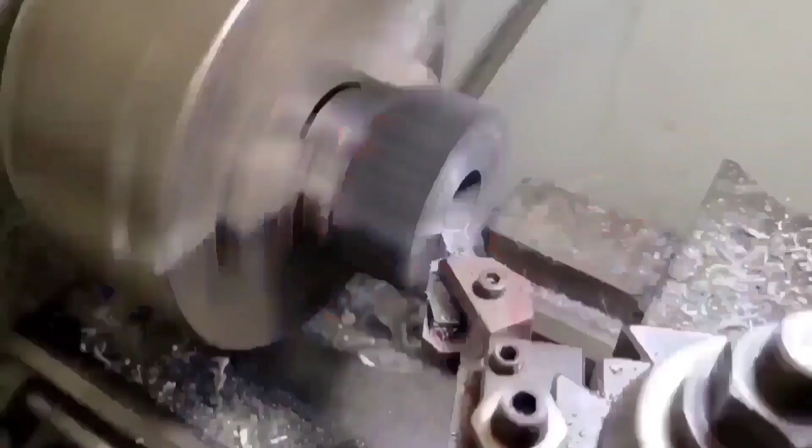How you doing, guys? Today we are starting the reassembly of the Briggs & Stratton engine.

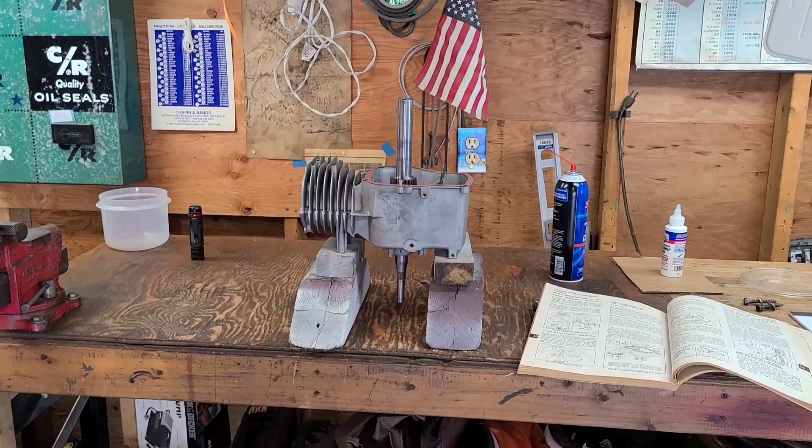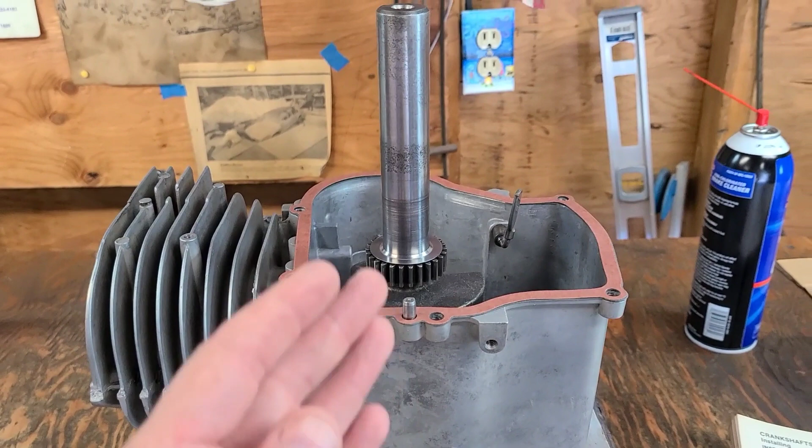One of the last things I had to do or measure was the crankshaft end play. There was a ton of play in the crankshaft, almost 20 thousandths. So this thing with a 15 thousandths gasket, which is the minimum, and the cover had four of the bolts in and snugged down, it still had, with the dial indicator, 21 thousandths of end play. So the crankshaft knocked around quite a bit.

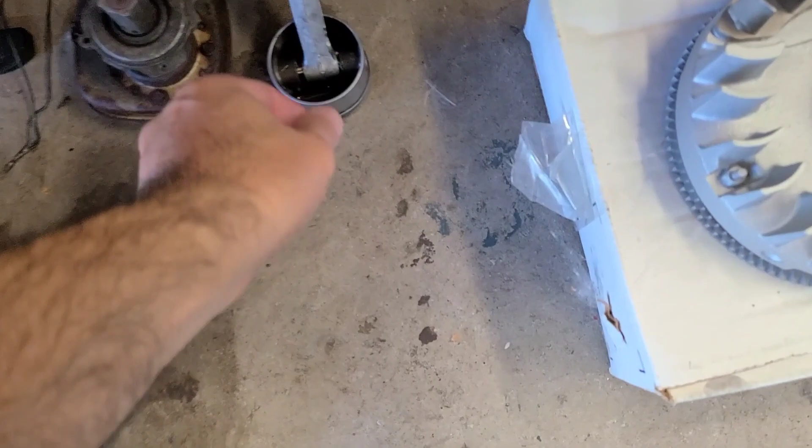I knew that was going to be a problem because when I took the engine apart, there was a lot of crankshaft end play. And also, I know there were a couple comments. People were saying, oh, this is a waste of time, I just change the oil and add fuel to my Briggs & Stratton engines. And you know what? You're probably right.

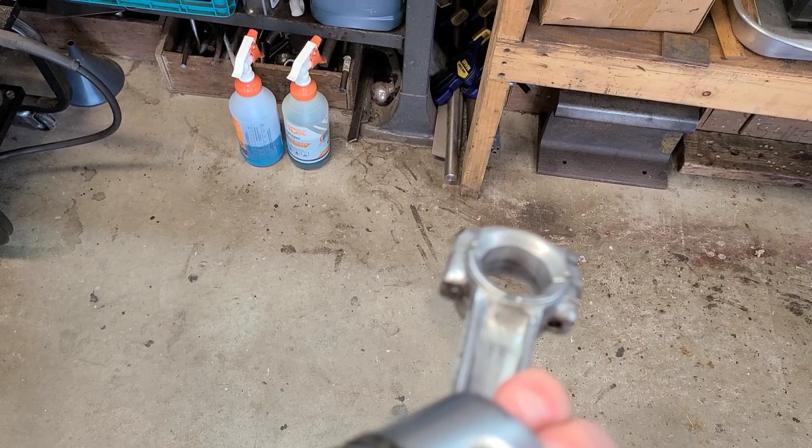But this engine, right there, you can see this thing had a rod knock right by that oil hole. There it is. You can see the crankshaft was making contact with it. And it's in the thrust side and the power stroke side of the rod end. You can see where this is clean. And in my prior videos, I showed that the bore was scored really bad.

So this was not just change the oil and add fuel. There was no way to get this particular engine back up and running. It would run, but it would eventually explode and probably smoke like a freight train. So that's the reason why. So now, back to the subject matter.

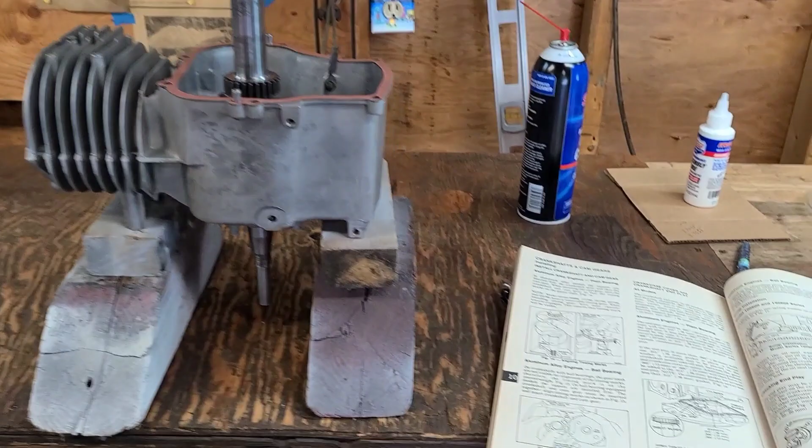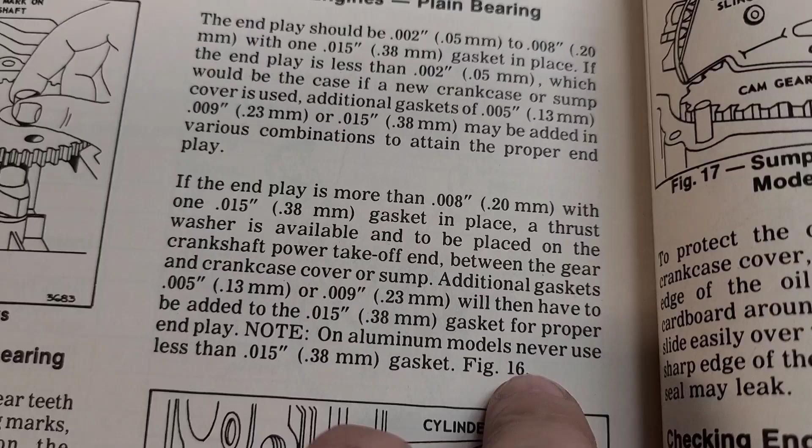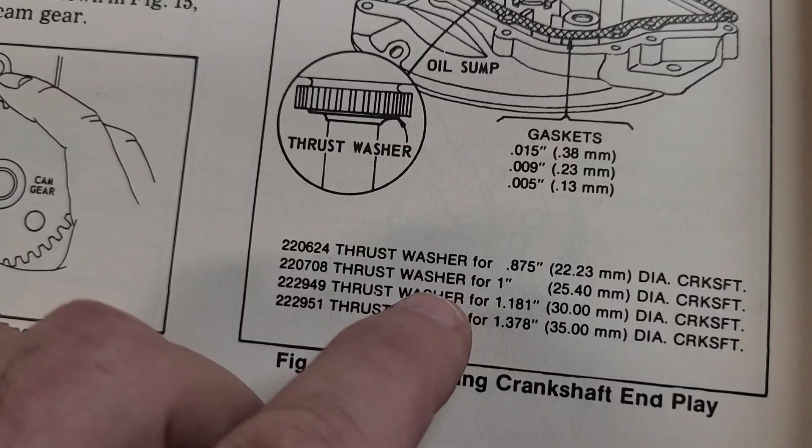Crankshaft end play. I had about 21 thousandths crankshaft end play, so I needed to get a couple parts. The specification is 2 to 8 thousandths end play for the aluminum block. So I had to order part number 220708, which is for a 1-inch PTO crankshaft. That's the thrust washer. It goes between the oil sump and the crank timing gear.

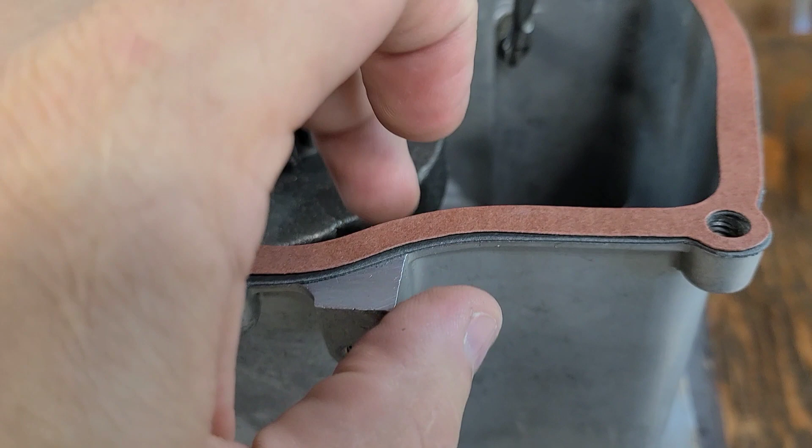There's a little shim that you can put in, which I have right here. It was cheap, $6, so I said the heck with it. So it's in place. I then took my minimum 15 thousandths gasket, the dark gasket right there, a standard sump gasket for Briggs & Stratton engines. Measured it. We were too tight. It was actually tight to turn the crank, and there was no play. So I was like, all right, we need to do something else.

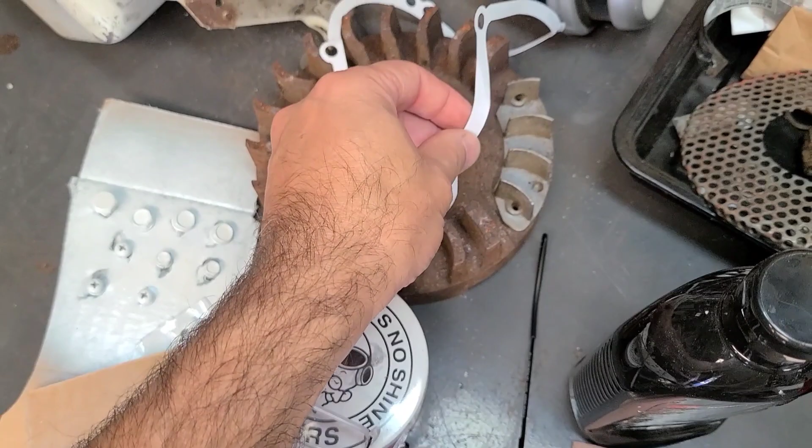So I pulled out an old 5 thousandths thick shim gasket out of a kit. Unfortunately, this one was ripped and folded in half, but when I put it in place and snugged down the bolts, I ended up with 3 to 4 thousandths end play. Perfect. So I ordered a new gasket because the one I had was destroyed. Here it is. Put the cover on, and I'm measuring 3 thousandths.

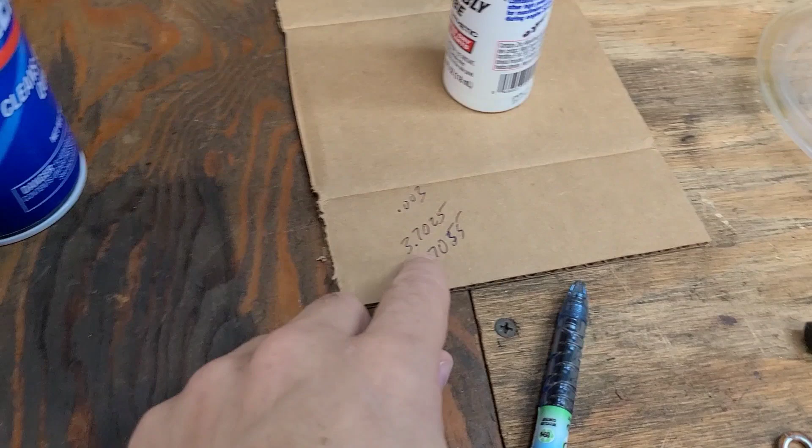I was at 3.7025, measuring from the end of the crankshaft to the top of the bearing in the sump. And then with the gasket, I ended up being 3.7055, and that's snugged down. So it gave me like 3 thousandths clearance. The crank spins in the block perfectly.

So with all that sorted out, I'm going to blow out the block, take a pipe cleaner, clean the valve guides out real good, make sure everything's clean and ready for assembly. And the first thing we're going to do is put the valves back in.

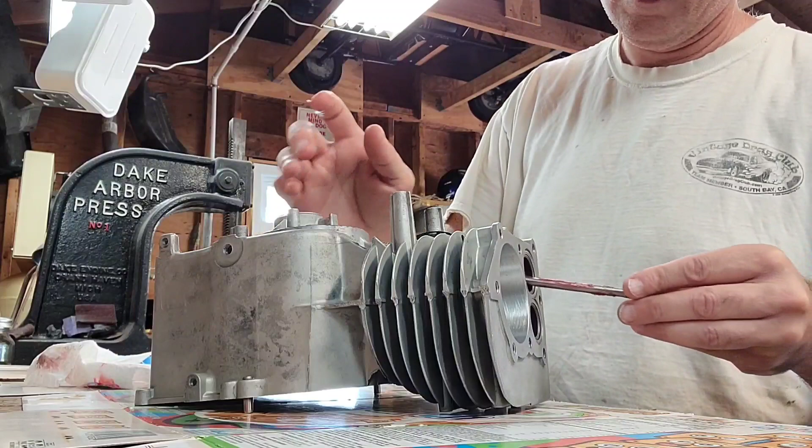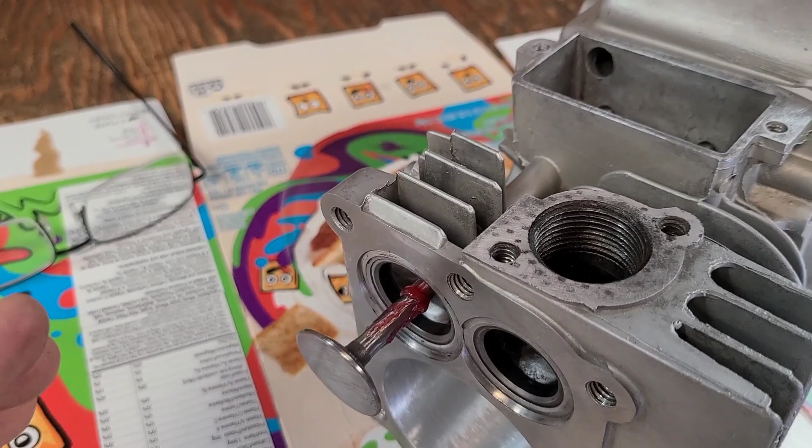With the valve stem all greased up and the guide all greased up, we're ready to go. I got my spring and my keeper in the spring compressor, so I'm going to line them up, get this smaller piece of the keeper set in the groove of the valve, and then I'll unload the spring pressure, and that valve should be a-okay.

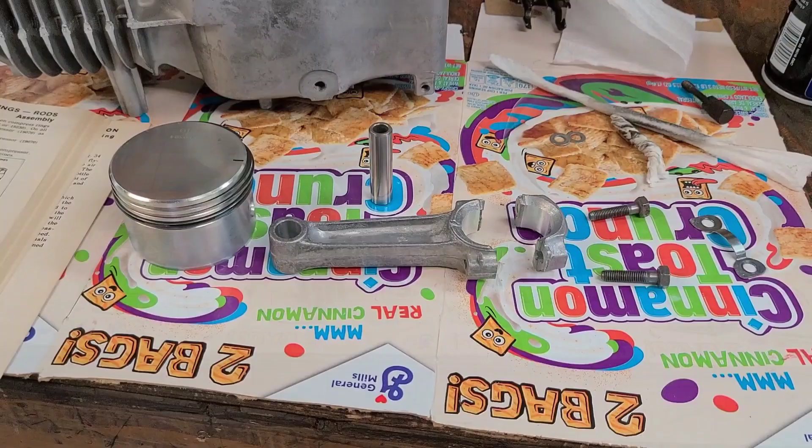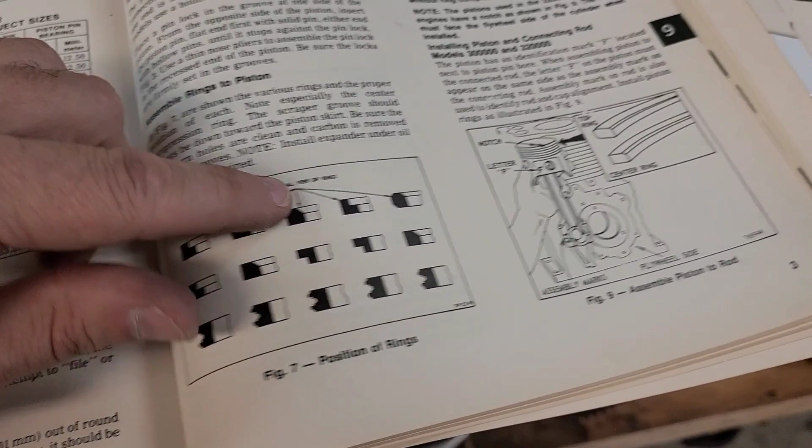All right, we got the piston rings on the piston. For my particular engine, this is the diagram that I used. The bevel's up on the top ring, the scraper is facing towards the skirts, and then the oil control ring can go in either direction.

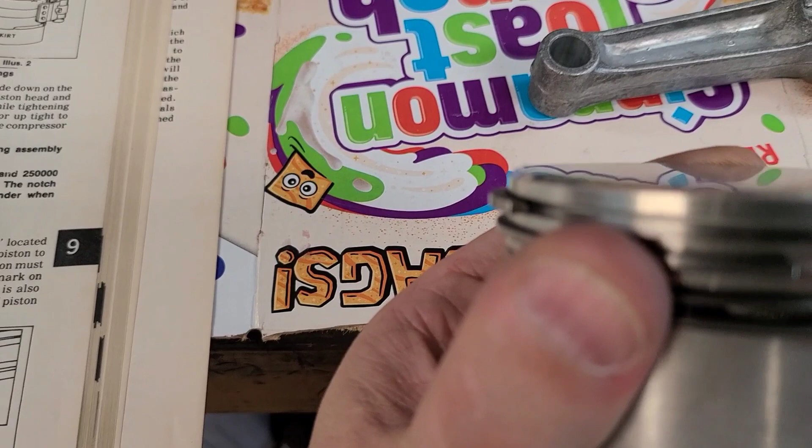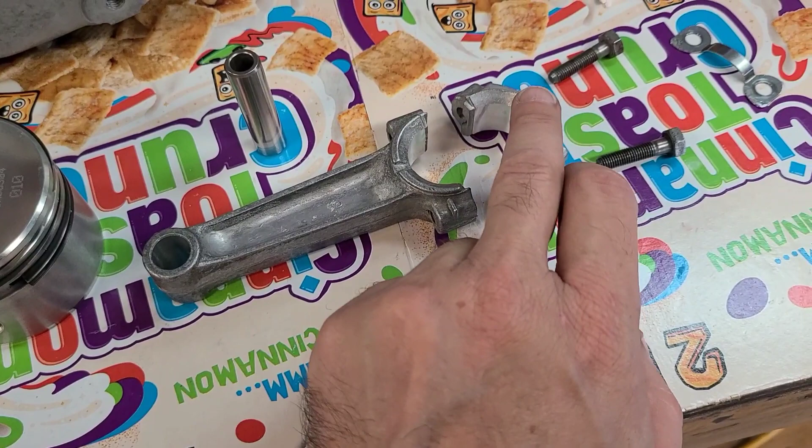So there, right there. Let's see if we can get this straight. Not really, but trust me, the groove is up on that, and if we go like this, you can see the scraper is down. So that's all set to go. Clean the rod, clean the cap, clean the bolts.

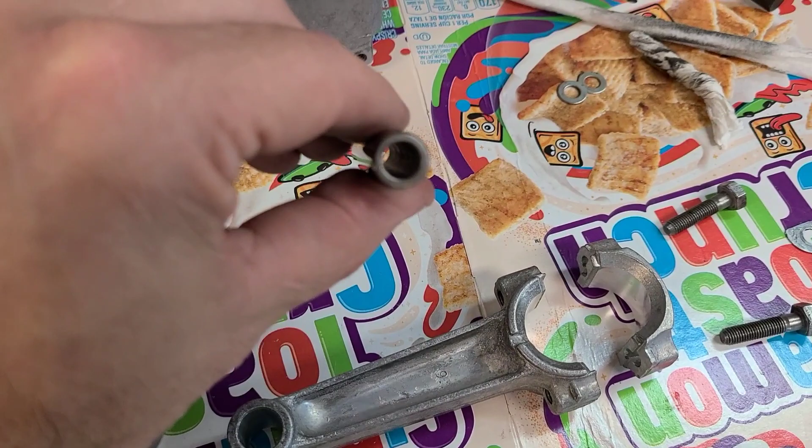This engine didn't have a bolt retainer, and the rod didn't come with one, so I had another engine, a junk engine, so I pulled the bolt retainer off it, and I'm going to use that to hold the bolts in place. I cleaned the pin. If you have a hollowed out one or a tube style one like this, make sure you clean the inside. All that garbage came out from inside that pin, so make sure you clean that.

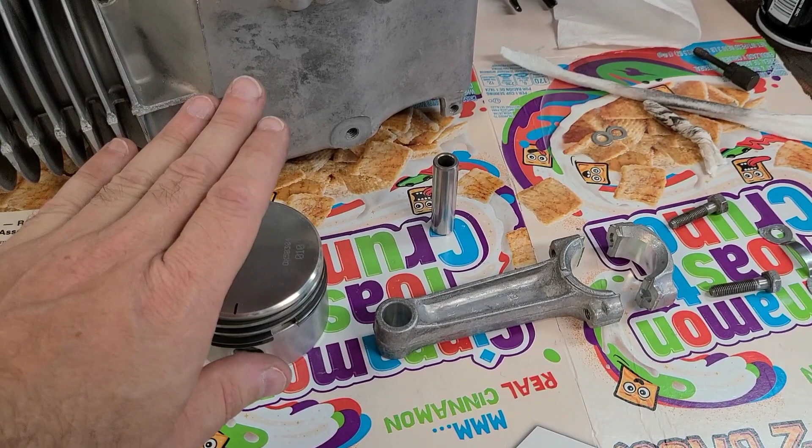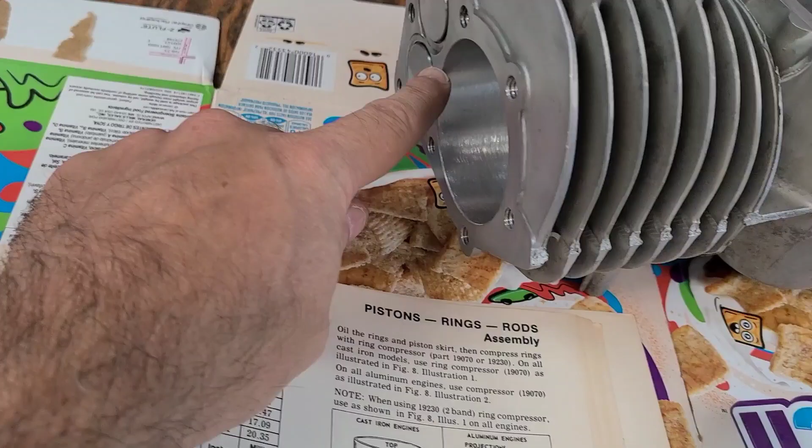Everything is squeaky clean. I'm going to go ahead and install the piston on the rod. The way I have it oriented is like this, so basically the markings of the piston will be towards the valves, and the oil hole is facing up. So I made a little mark just to remind me that the piston has to go on the rod in this direction. All right, let's get it all lubed up and put back together, and then we can start talking about installing the crank.

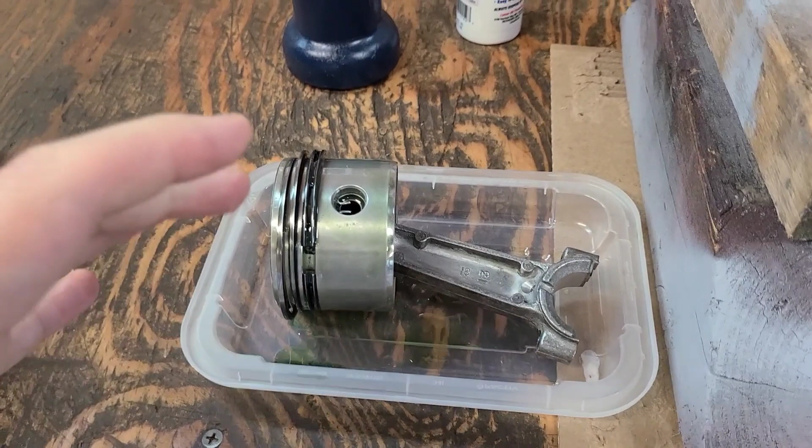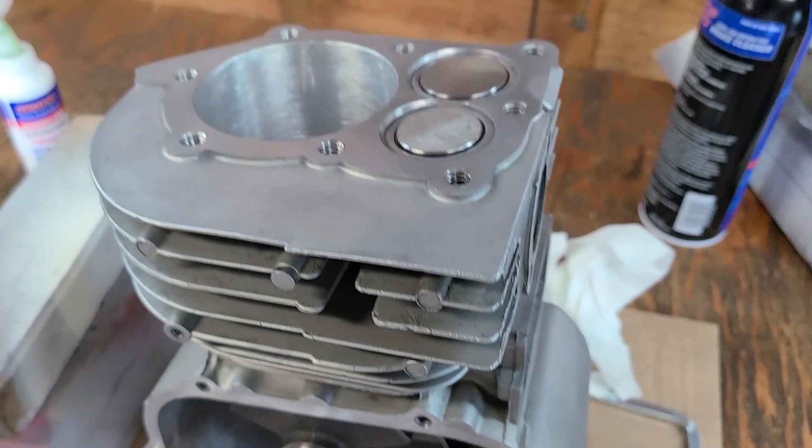I have the piston all lubed up, all the rings. I've staggered the rings so none of the end gaps are in line with each other. I got the ring compressor out. One thing to note when you do an aluminum block engine, these little dimples in the ring compressor, you want those up. Those are for an iron block.

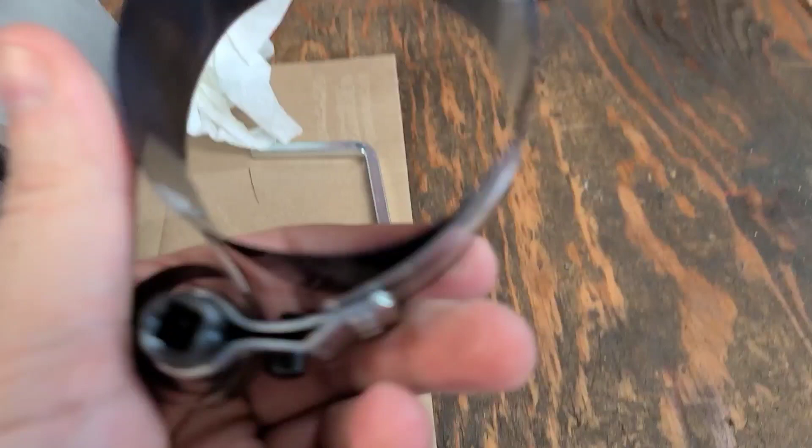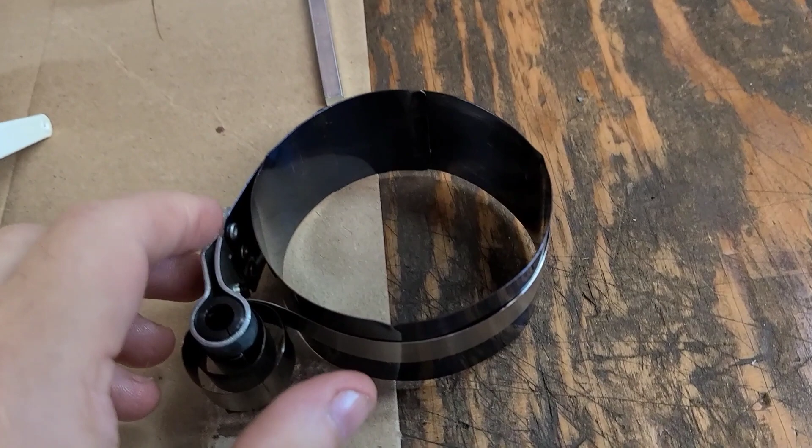If you did this on an aluminum block and you knock the piston into the motor, those little notches that you can see can actually make marks and really mess up the deck. So make sure you don't use this side. You want to use the flat side or the round side of your ring compressor. That is what you want facing the deck of the block. So I'm going to go ahead and lube everything up and knock that piston in.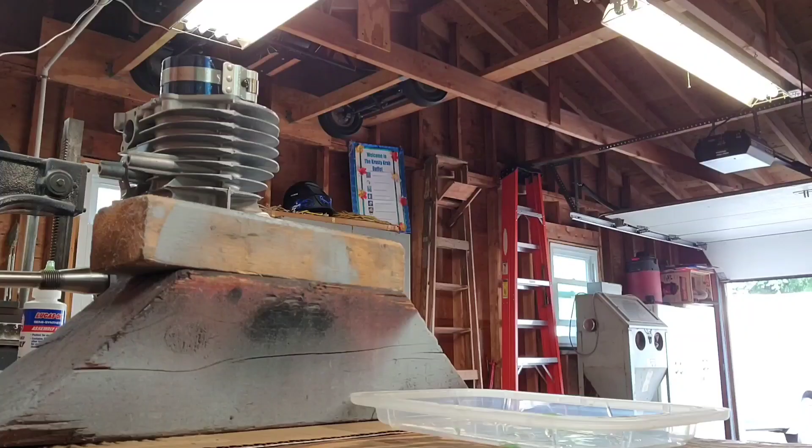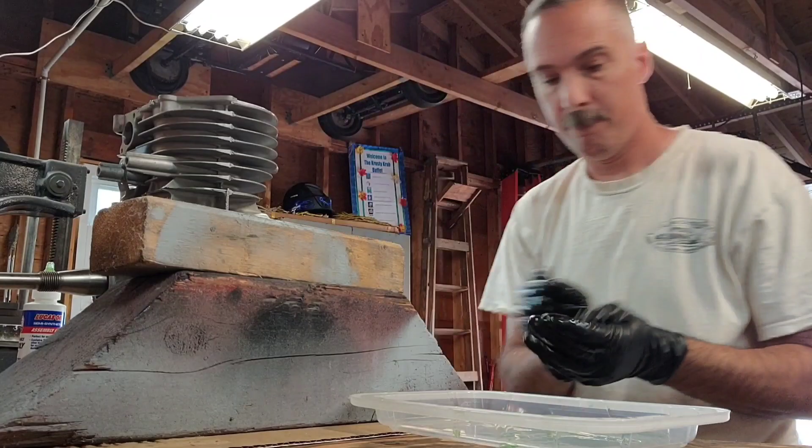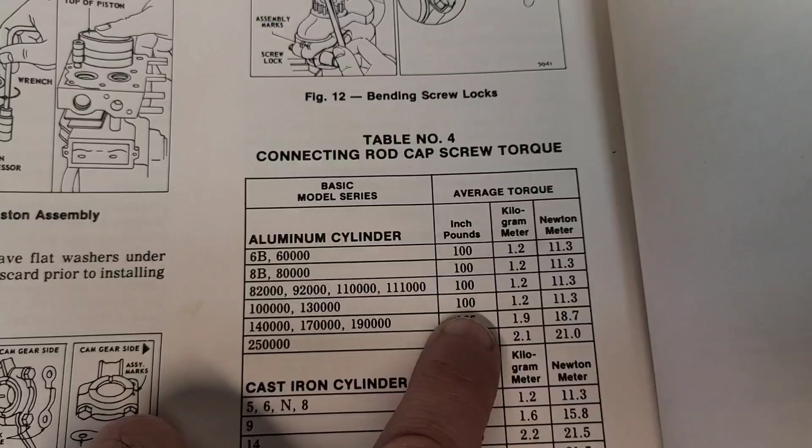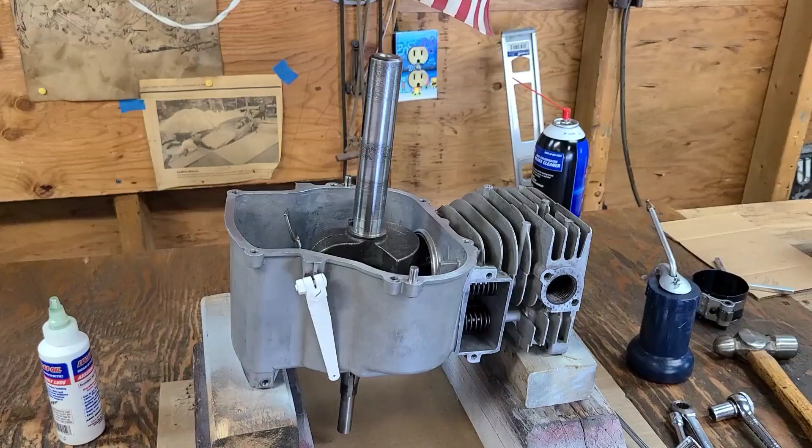All right, piston's in, rod is in. I got the bolts just snugged down. I broke out my old school bar torque wrench. If we go to the book here, where am I? Aluminum, right? Yeah, there, 130,000 number, 100 inch-pounds. So that's what we're gonna do. I'll do it in a couple stages, bring it up to like 20, 30, then 50, and then I'll go to 100. And then I'll bend down the lock tabs with a pair of pliers. My mind skipped a beat there, sorry.

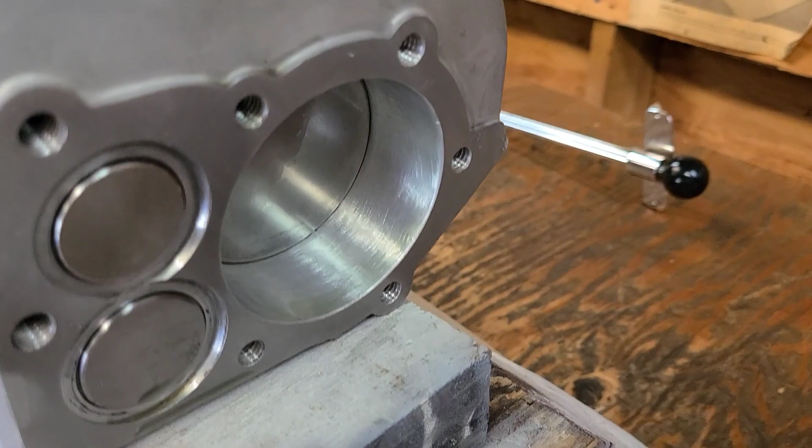Okay, everything's torqued down to 100 inch-pounds. I put the crank timing gear in place. I have the timing mark roughly right here. I don't know if that's exactly where it needs to be, but it's probably pretty close. I did spin the motor around. It spins real nice, real smooth. As you can see, everything in the bore is real nice. There's a couple little marks that are from the rings, but no gouges, no scratches, so we're good.

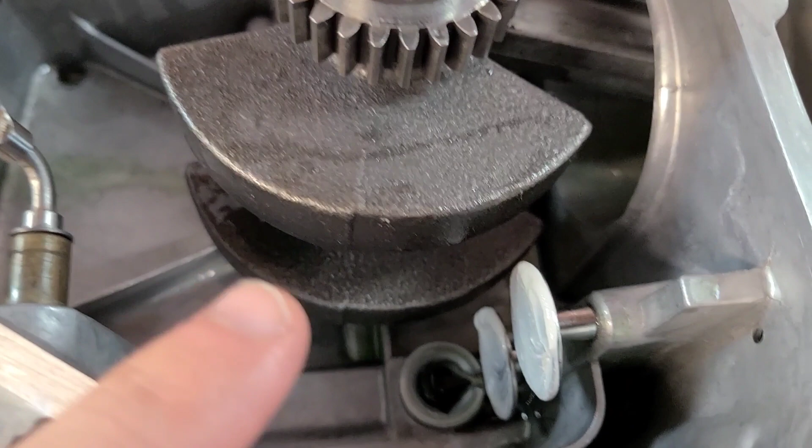Put the lifters in. The exhaust lifter went back in the exhaust bore, as well as the intake in the intake bore. A little bit of white lithium grease on the lobes and the lifters. I'll put assembly lube here on the end of the camshaft. I already filled the cam journal with assembly lube and oil, so that's all set. Basically, it's just line everything up and drop the cam in with the timing marks facing each other.

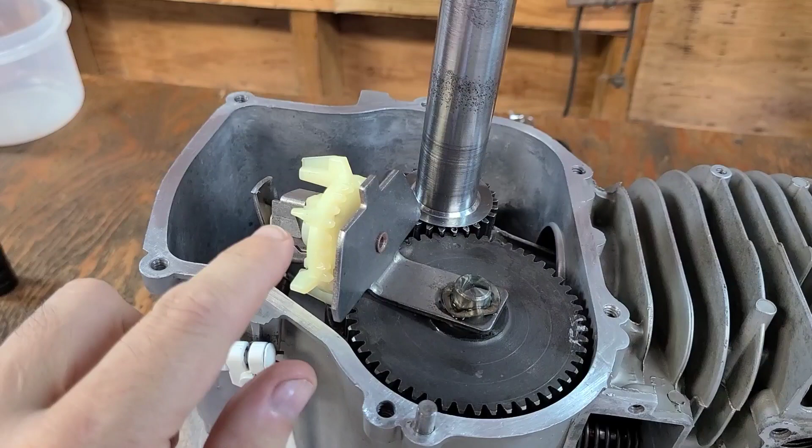With the cam now in the motor, I got the oil slinger and the governor in place. Then right there is the little tension washer that goes between the governor arm or the slinger arm and the sump. I also have the crank shim in place, so that just needs to be lubed up, and we have our timing marks right there in alignment. So we should be all set. Just lubricate everything up really good, and then I'm going to get the 2 gaskets and the oil sump and put that on and start to torque that in place.

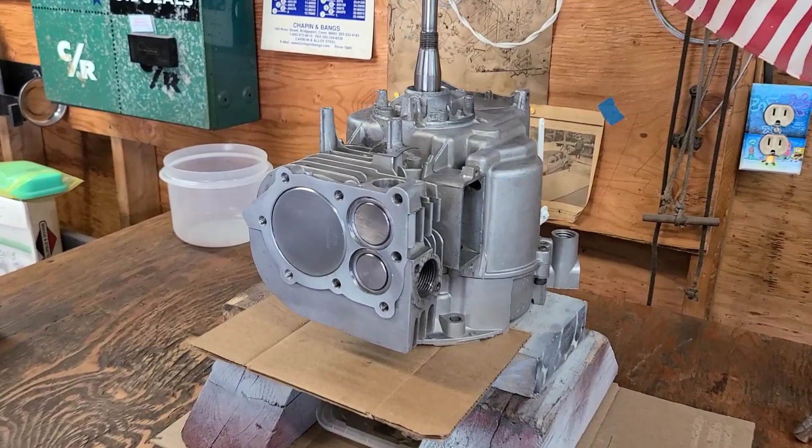There's the bulk of the short block all back together. I mean, everything just looks so good. Engine spins around real nice. The crank doesn't really have any end play. It's a little tighter than I would have liked, but the engine spins around so smooth and nice. There's no real resistance or anything.

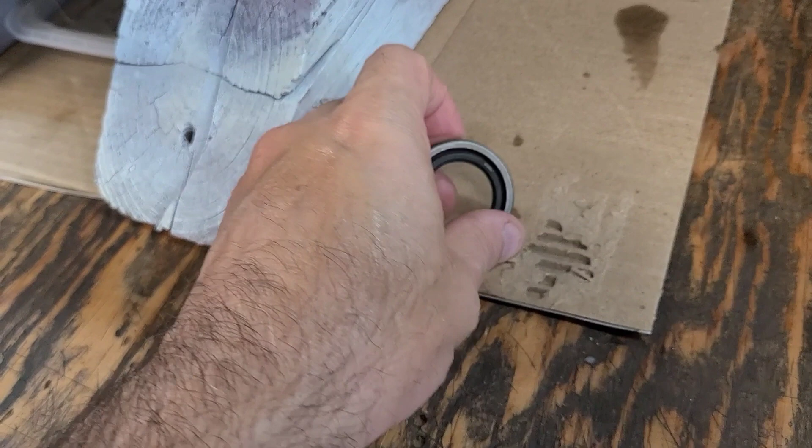The only fail, if there was a fail, is I went to go put the main seal in, and when I sprayed it with some brake cleaner just to make sure it was clean, a big chunk broke off it and it cracked. So unfortunately, the main seal for the PTO, that's junk, and I'm not going to use it. I'm just going to get another one, because where this is going to go on the tractor, if it starts to really leak bad out that PTO seal, it's going to be a complete nightmare.

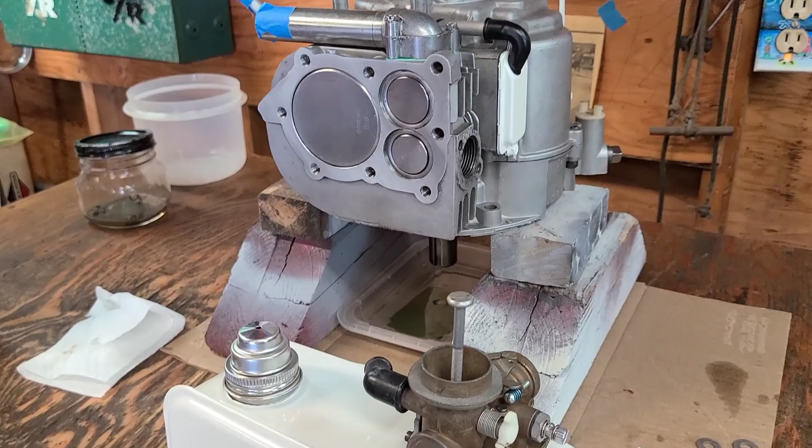So I'm going to go ahead, order one of those up, be back, and we'll start putting the other ancillary parts on the motor. Because I'm getting ready to put the head on, and this is probably one of the reasons why I don't like working on Briggs & Stratton engines. Everything on these engines, even the old 5-horse L-head horizontal shaft engines, everything's just layered.

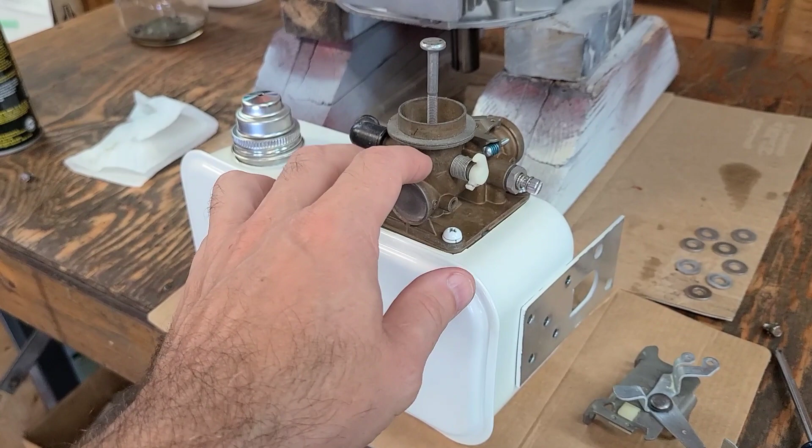It's just such a pain in the ass. You can't put the head on unless you have the gas tank ready. Well, you can't have the gas tank ready until you have the carburetor. Well, you can't really do the carburetor until you have all the governor stuff put in place. It's like layers upon layers, because the head bolts actually go through this plate, this mounting plate.

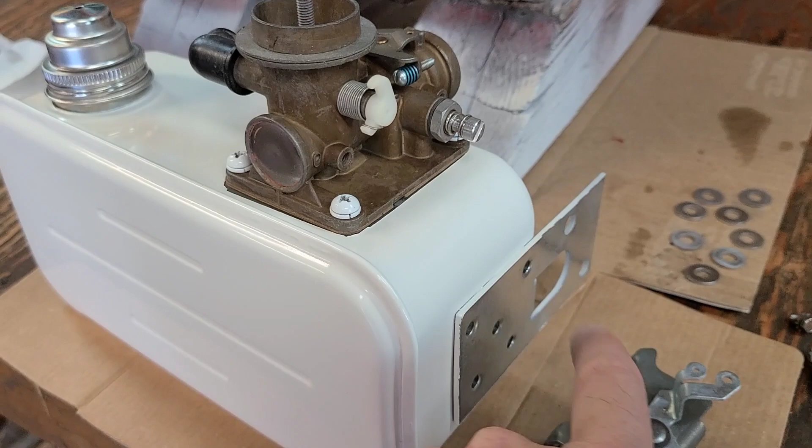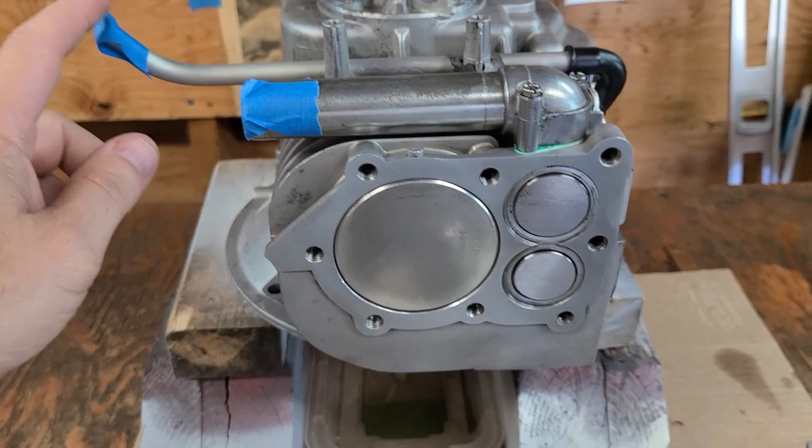So in order to put the head on, I gotta start the head and then get the gas tank on, because this is the intake tube. This is the breather tube, right? Intake area and the breather right there. So you gotta have all that ready to go, so you can just put it all on and then torque the head into place.

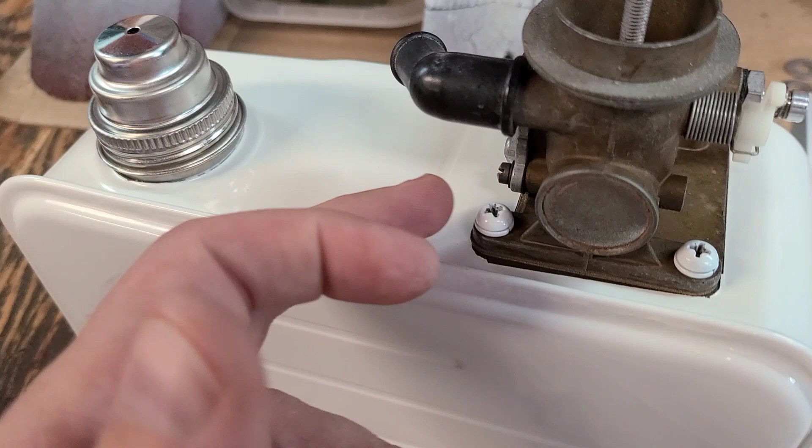The other thing too is, obviously I put the carburetor on real quick, held in by 3 screws. I did put 2 base gaskets in, which is not right, because you're only supposed to have 1. But my other carburetor would always weep fuel out this side, and I had another one of these engines that had 2 gaskets, and it never weeped. So even though this carburetor's NOS, I just barely snugged the 3 screws that hold it in place, so that way I don't warp the base. So that's all bolted in.

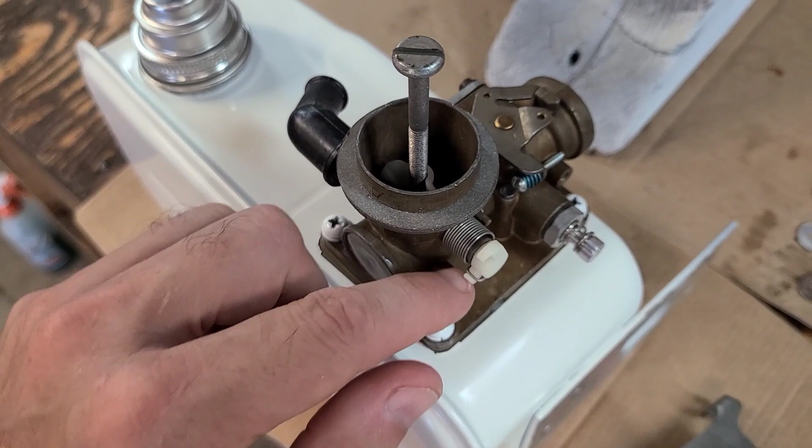I have the screw to keep the choke plate in place, so when I mount the throttle piece to the side of the carburetor, this little bottom tang actually hits the base of the throttle. It takes a couple little tiny screws. I have one right here, and the second one is right there, mounted in this position and that position. Again, this is an NOS carburetor, so I'm going on the assumption that the pulse diaphragm is fine and everything is set up. I might reset this jet just in case, but overall it should be ready to go.

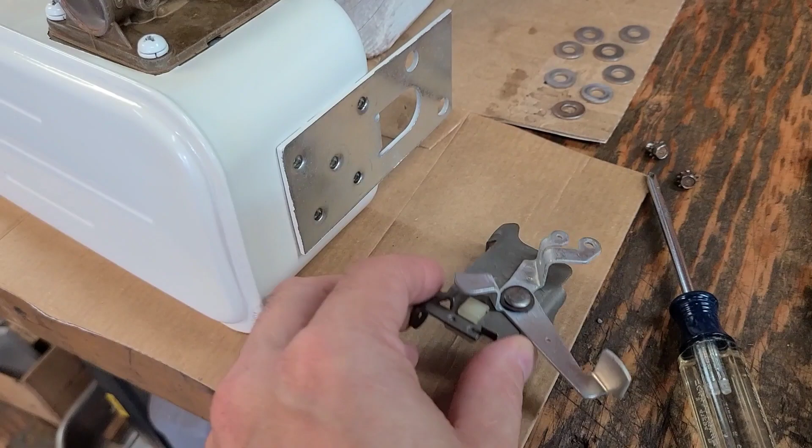So I'm going to bolt this into place, and then I got to clean this up because oil is kind of weeping out of the bore a little bit from the rings. I'm going to push the piston back, re-oil the bore, tip the engine a little bit, and start to install the head.

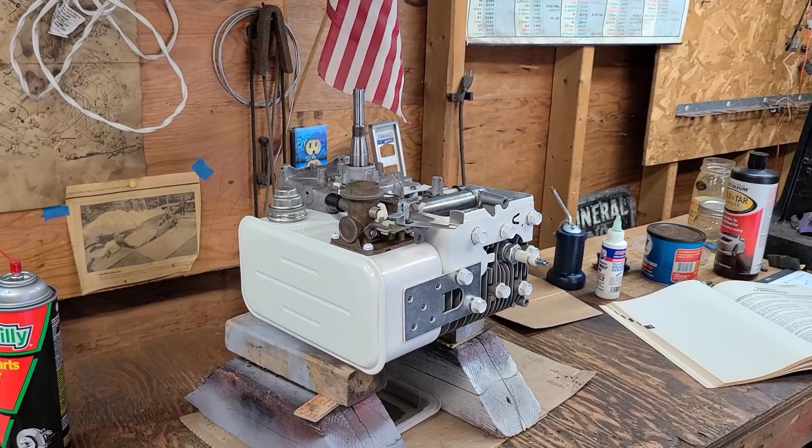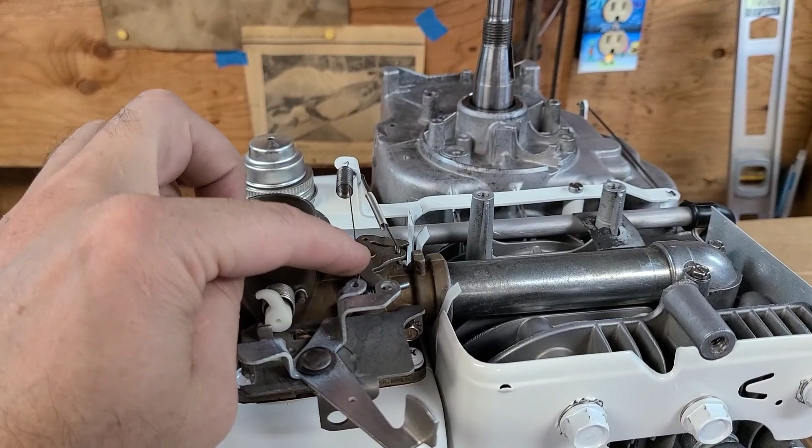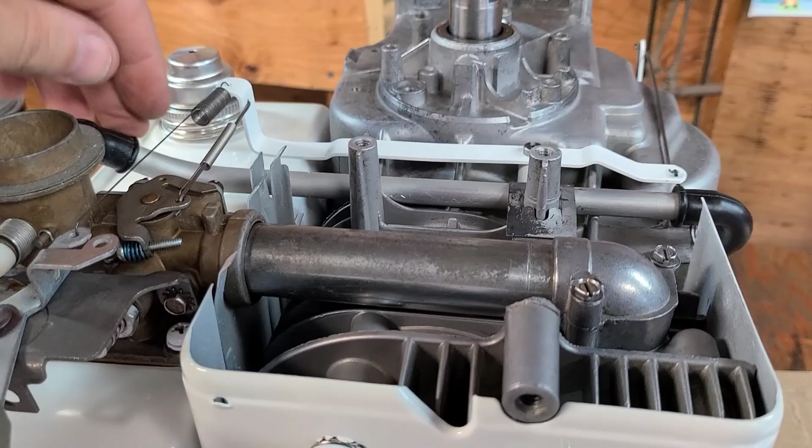So after a little bit of a fight, everything is in place. Gas tank is installed, carburetor is installed, throttle's installed, the governor spring is installed. We've got all the little linkages for the governor installed, the arm, everything moves nice and free. So I'm really happy about that. The breather tube is hooked up and done. The head bolts are all in place. They've all been torqued to 140 inch-pounds as per the manual, using the pattern they've given.

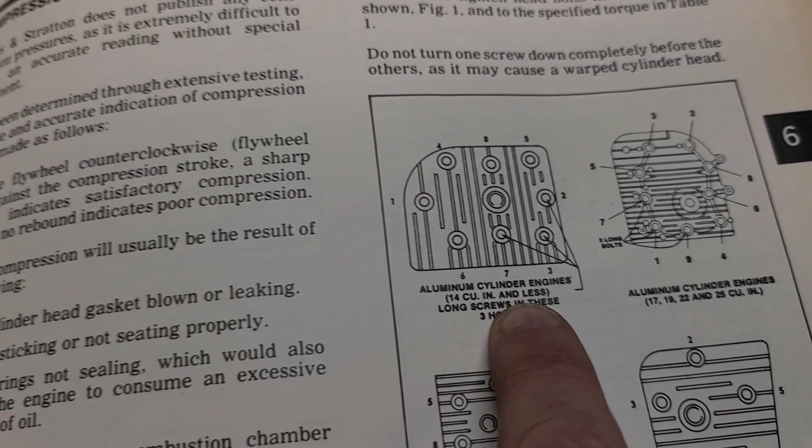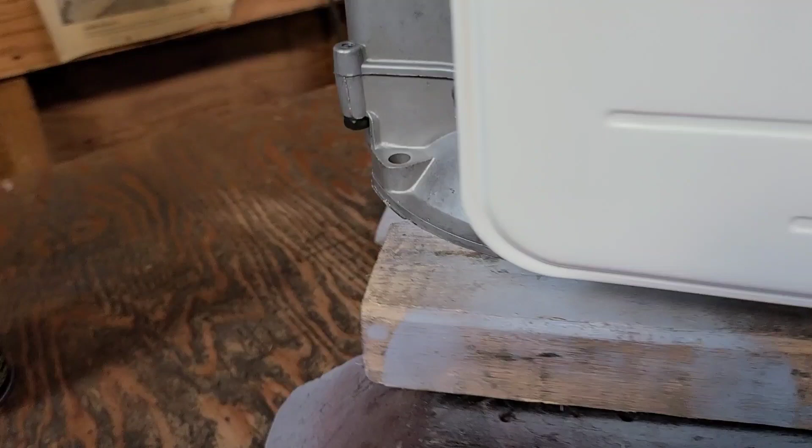So that's all done. What else? Oh yes, the bore tin underneath, that's installed. I am still waiting for the lower seal; I'll have to install that carefully once it shows up. The only thing I have a bit of an issue with is the back bolt for the gas tank. I really had to crank on the gas tank to get this bolt in. This is just temporary until I find the original, but it's a little disconcerting. What are you going to do? Moving on. I'm not stopping.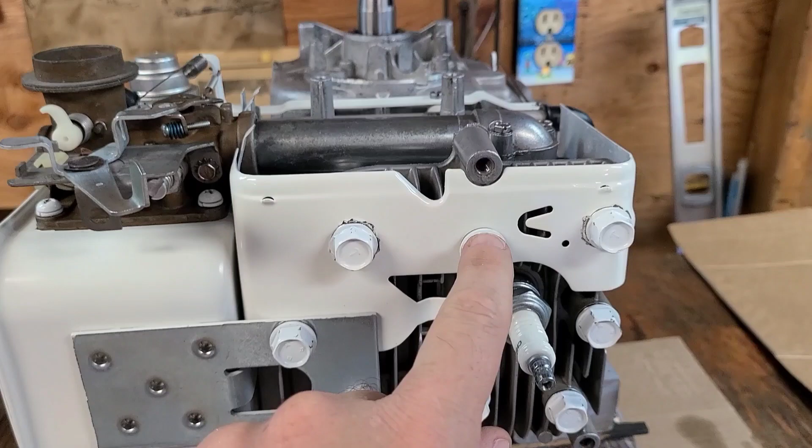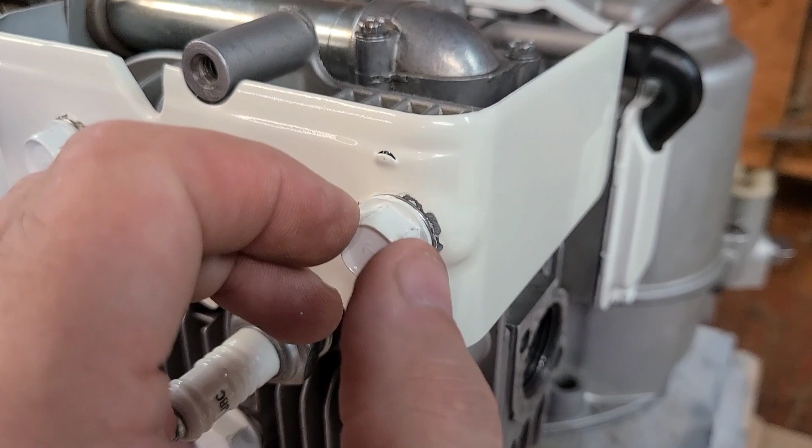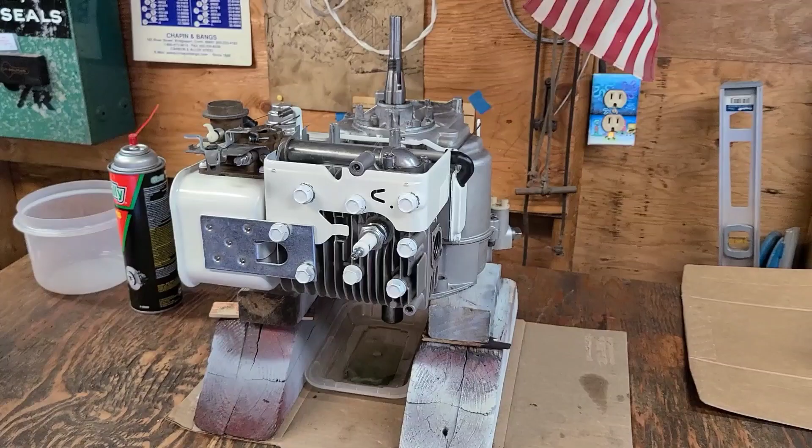Everything lines up real nice, but whatever. Maybe this bracket's a little tweaked. Who knows? Who cares? The paint got a little chewed up where I torqued the bolts down, but it is what it is. And then I have the new spark plug in place. I have to gap it, and I still have to put the ignition module in. I still have to put the stator in. There's a couple other pieces of tin that have to go on, flywheel, clutch, the whole 9 yards. But that will be for another video.